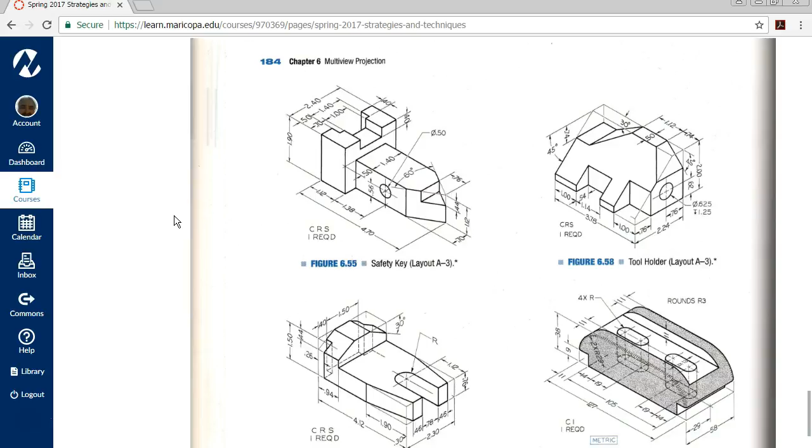So we're going to tackle the finger guide. One of the things that I like about these isometric views is they're a little more complicated than what you're at in Chapter 1, Chapter 2. This is more along the lines of maybe Chapter 3, or a little more detailed in Chapter 3. These are also similar to what you're going to find in the CSWA as far as what you're looking at in the way of geometry.

So if we were to look at the finger guide as a CSWA project, you would have maybe this isometric view of what it looks like. We would go over one screen. You would have a front view, a side view, a top view, and then whatever details are in that grouping. So a good portion of this is thinking in 3D.

Again, what I like about the engineering design and graphics with SolidWorks is there's a lot of little projects that are repetitive in nature, and you're stepping through that process over and over again. Well, these are a little more complicated, and way back in 2000, whenever I had the time, I got out my technical drawing book from my first drafting class, and I sat down and did all of the exercises, all of these figures, in about 40 hours. So from a speed standpoint, the things you're going to encounter, the things you have problems with, it's that repetition and going through the process that's going to highlight those areas.

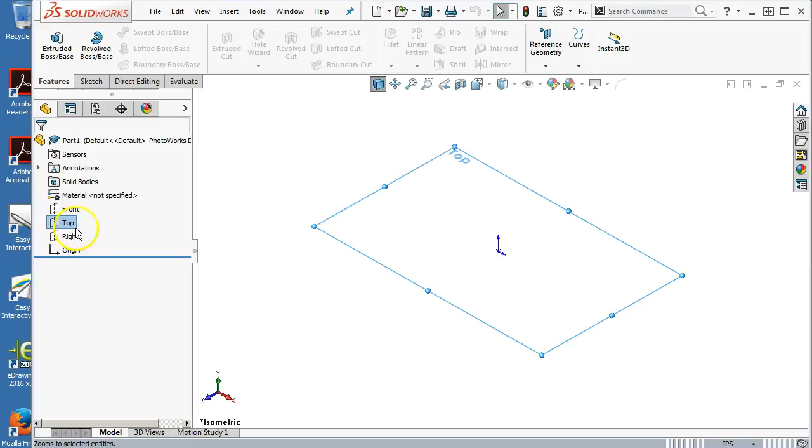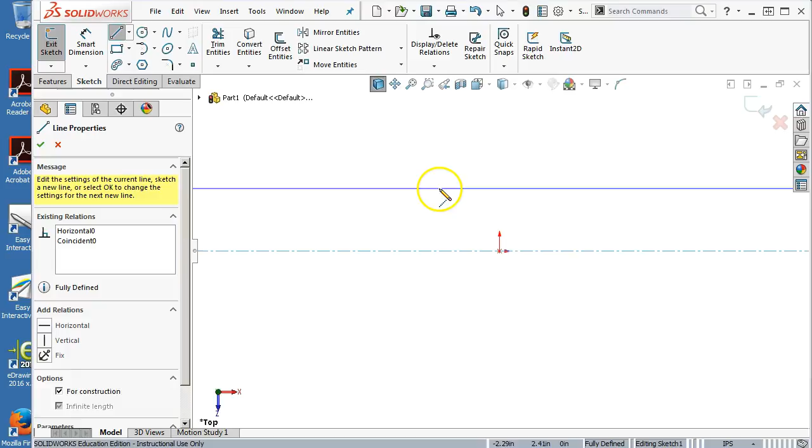And I've identified some symmetry from the top to the bottom, or left to right. So whenever you see symmetry, you're going to go directly into a center line. Horizontal in this case, I'll make it infinite length because I don't want to run out of center line. And then I just go back into the select.

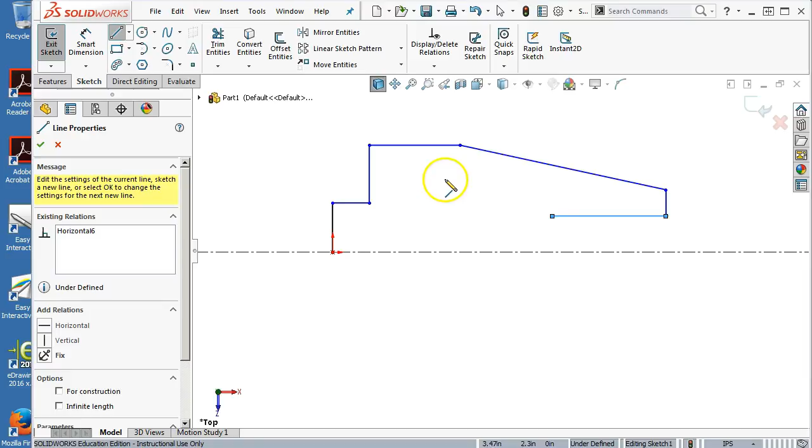All right, I'm going to trace this outside shape. And when I get over to the last portion of it, I don't really want to include the circle just yet, or the arc. This is the point where I can go ahead with the mirror. So if I select left to right, the center line is not going to be included. If I select from right to left, the center line is included. I can go directly into the mirror and get the continuation of the geometry.

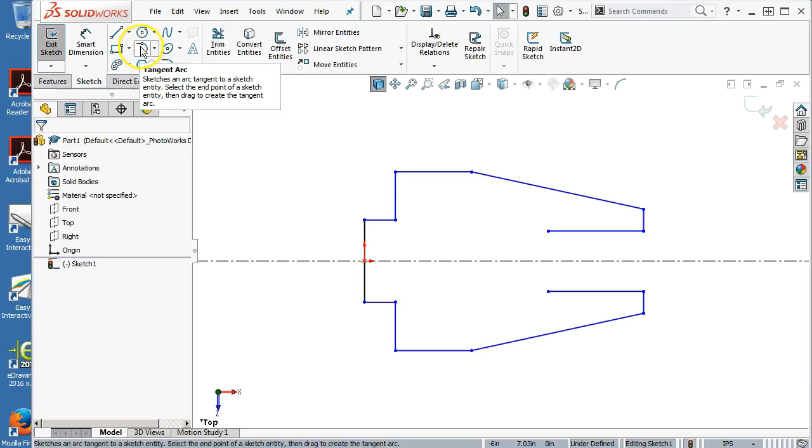Now when I go into tangent arc, I have something to connect the other end to, and we'll have that finished shape.

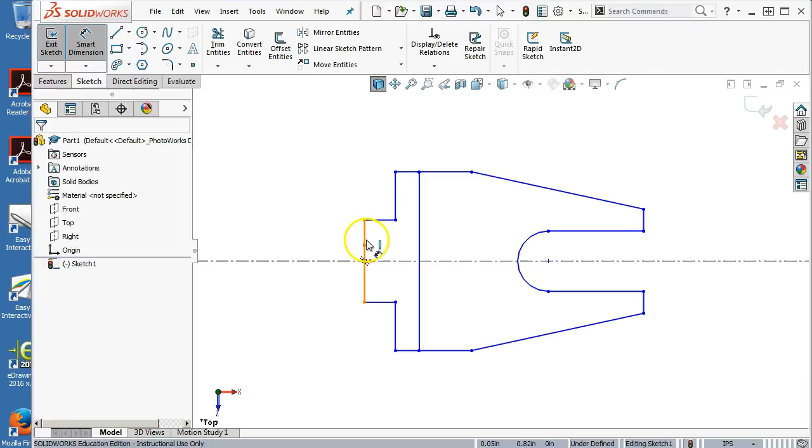To make this like the 2D drawing, we have a line somewhere in about there. As soon as I put that line in, now I'm into the contours and regions. I've made a decision that says there are two separate areas here. There's a complete contour, and then there's an intersecting region that we can go pick from. All of that sketching comes back to—I should have inferred all of the relations, or at least the relations that I need. And now we're back to picking up the geometry.

Not sure what I just put in, so let's double check it. 1.5—might have put in 150. I have to go back and watch the video on that one.

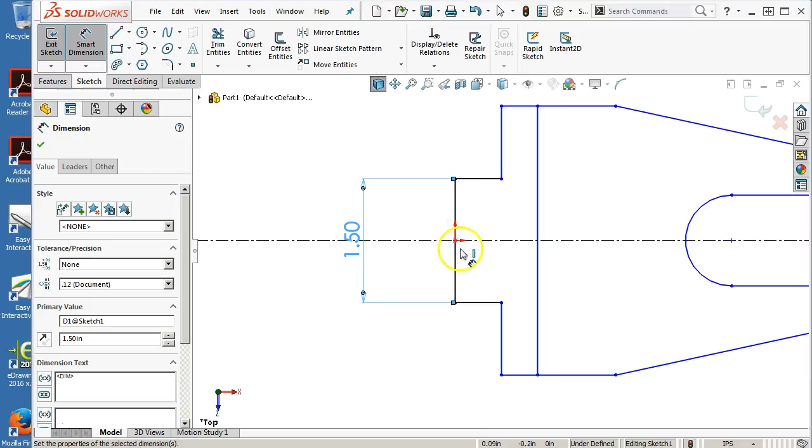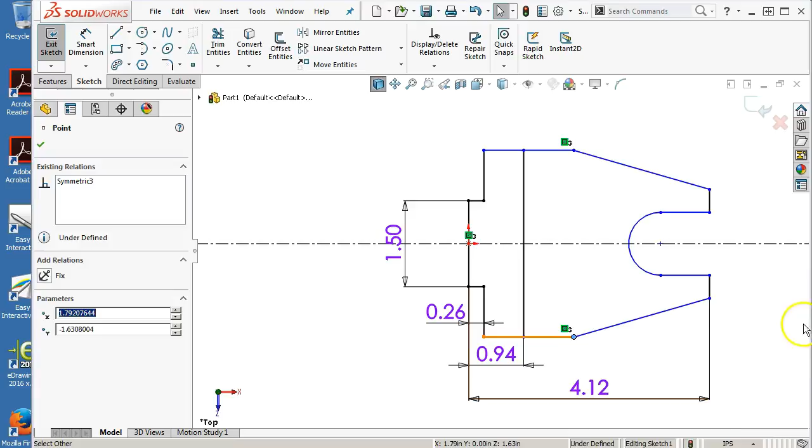All right. Let's see, we have a 0.26. 0.94 to the edge. Let's go ahead and get the overall in place, and 4.12. And we'll go ahead and drag that one out a little ways. We have a full radius for 0.78. I'll go ahead with that dimension, and it's pushed back 1.12. And then a width of 0.46.

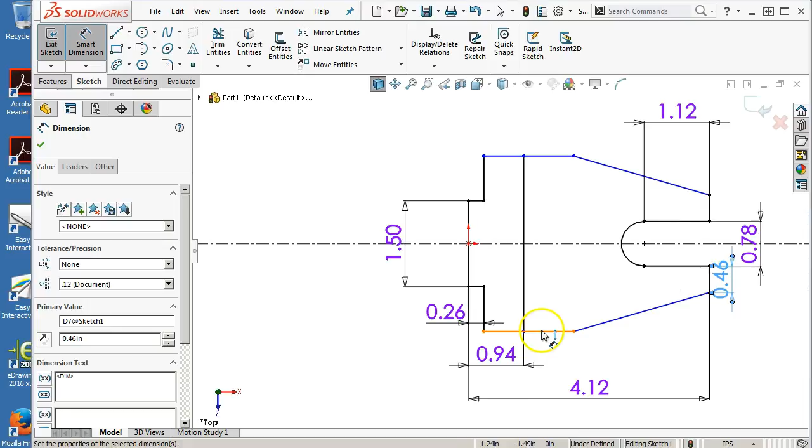So what else? What am I missing? Oh, the overall width then is 2.3. All right, so that's starting to come together, looks pretty good. And then—

Being careful or observing the angled line, keep in mind that we can go horizontal, and if I get close to it, I'll be in a linear dimension. When I come off to the side, then I'm in the vertical dimension. So I want to make sure to pull far enough down that I can get that linear dimension. So 1.9.

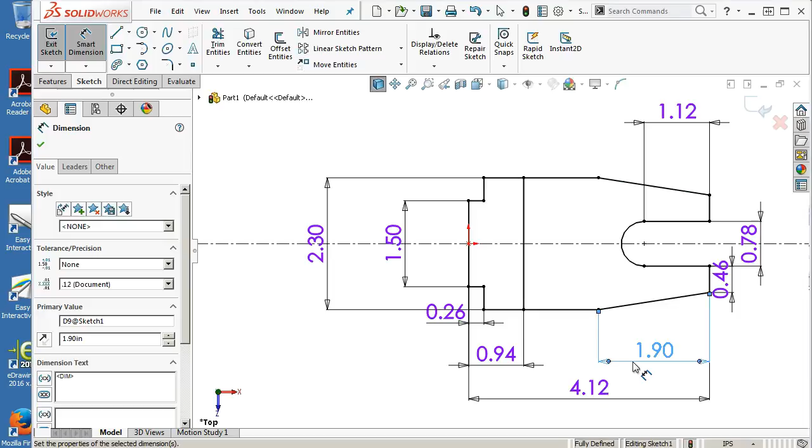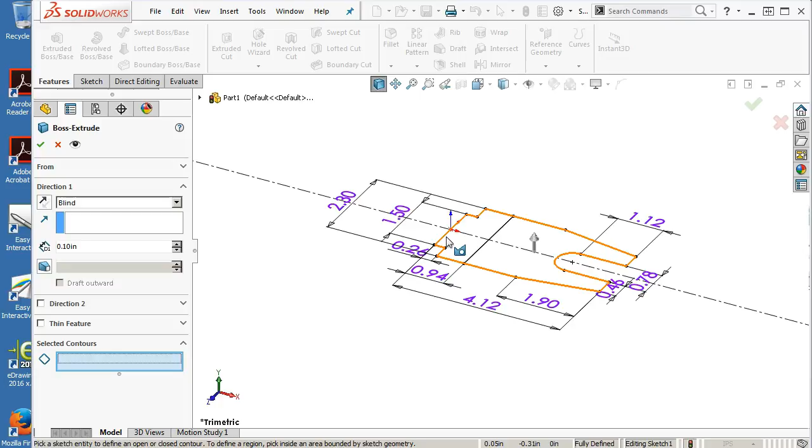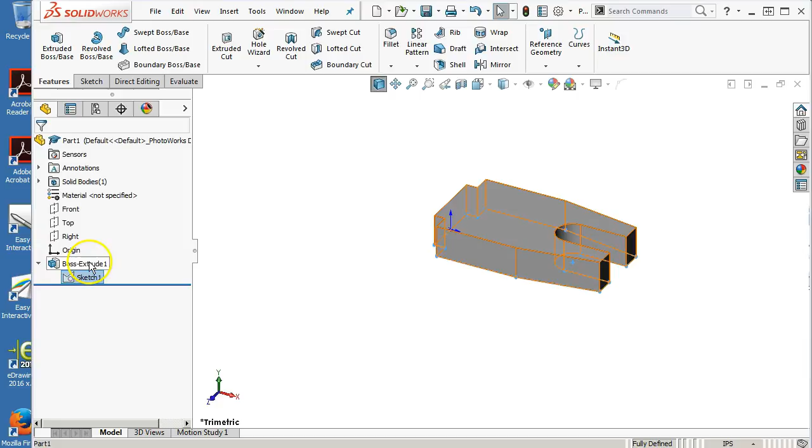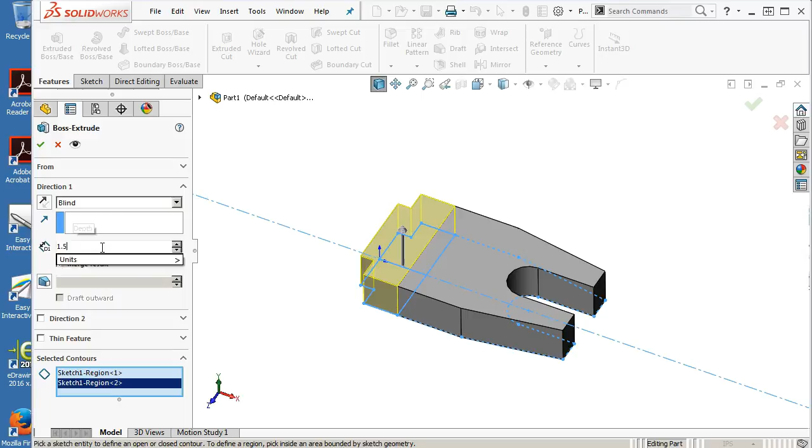I want to share that sketch, reuse the geometry that I created. So expanding out next to the feature, going back to sketch 1, making sure that it's highlighted, I can go right back into the extruded boss base, and we're selecting for contours and regions. Those are the two areas, the two regions that I want to make a little bit larger, and this is going for a distance of 1.5. All right, so in this case, because the merge result is on, I have a positive into a positive, and there's no net gain in volume or mass.

And if I turn that off and I have two solid bodies, then I have an overlap of mass, and would have to take that into consideration for any of my engineering calculations. All right, so we go ahead and accept. And that gives me the majority of the geometry.

All right, now I can go into a sketch on the front face and sketch the chamfers, but we need to introduce the chamfer tool at some point. So underneath fillet, we have a chamfer feature—fillet and chamfer are both under the fillet. And when I go into the chamfer feature, well, that was selected and that wasn't what I wanted.

And we'll go pick the two faces. All right, so we have an angle and distance. Well, we weren't exactly given an angle and distance. So yeah, we're 30 degrees and 0.44 on our numbers.

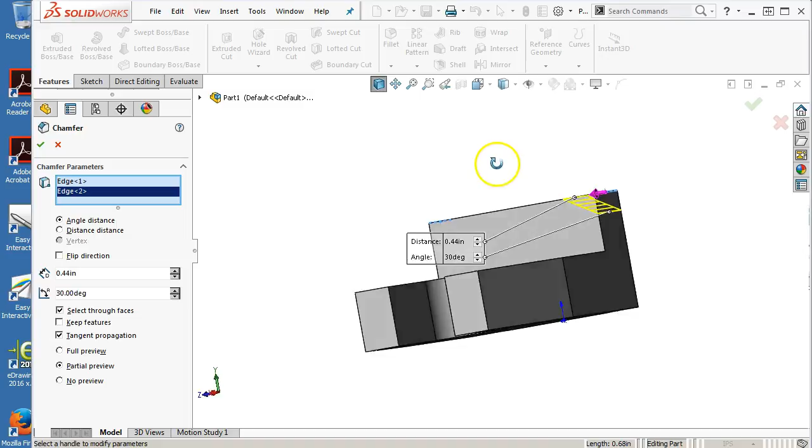So, 30 degrees and 0.44, and then we want to look at the preview. So that one looks close. We'll see what the preview looks like on that one.

All right, so based on the preview, we had an arrow coming this way. We had the arrow going down on this one, so I need to reverse it. You can pick on the arrow and flip the direction, or we can come over to the checkbox and flip the direction to see what the result looks like. So that doesn't quite look long enough, and we don't have anything to really shift that distance.

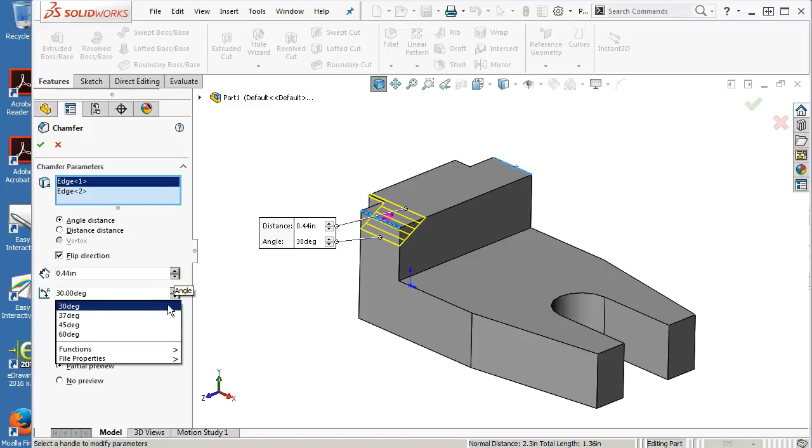So we're going to have to go to the adjacent angle, and that means that I can do 90 minus 30 degrees to end up with a 60-degree angle. Flip the direction, and then we'll check edge 2 and flip the direction, and that looks a little bit more like what I wanted to end up with.

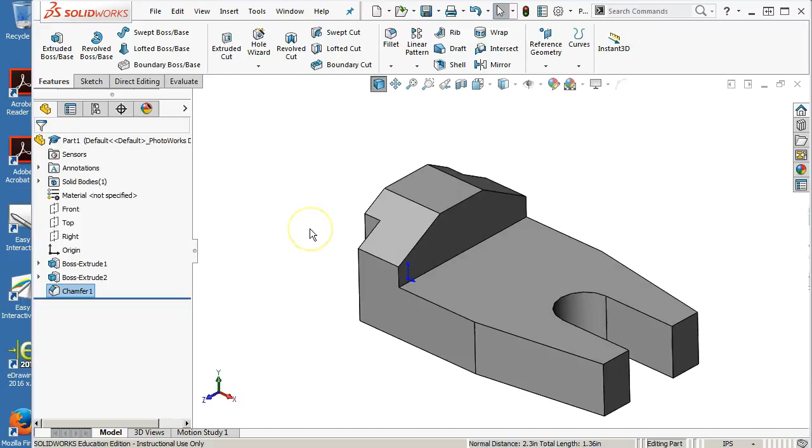All right, so when you're working with the chamfers, keep in mind that what you're selecting, or what the direction of that chamfer is going to be, is something you're going to have to manipulate and possibly pick a different angle or pick the adjacent angle to make it work. All right, so I'm going to go ahead and save this one.

And this is figure 6, finger guide.

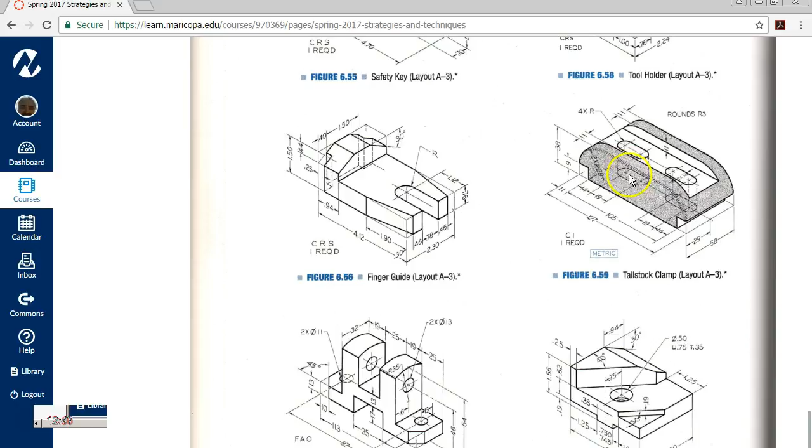Okay, so the shapes may look a little on the complicated side. The task is to break it down into manageable geometry. Going into the tailstock clamp, what jumps out is we have this nice profile out front, and we also have symmetry about the midline of the part. With the slots, we'll use the slot tool, and that part is in metric.

So, file new, part millimeter. Oh, that was one I made specifically for illustration. I have to pull that one back out.

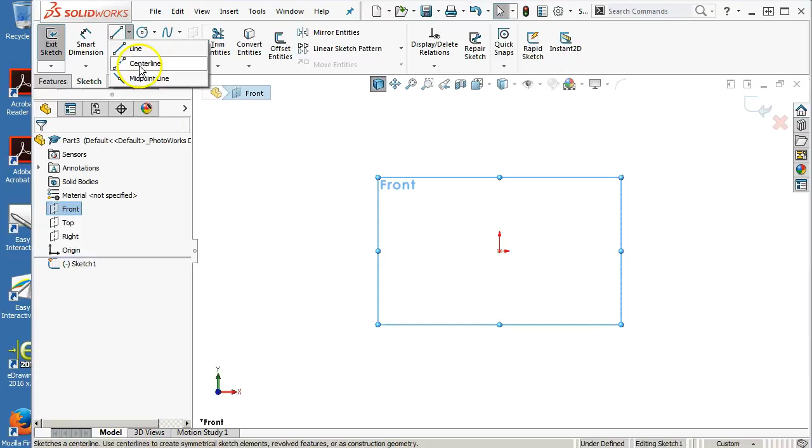So in this case, I want to be on the front plane, and with symmetry, we're going into the centerline. This time it will be vertical, infinite length, drop it on the origin.

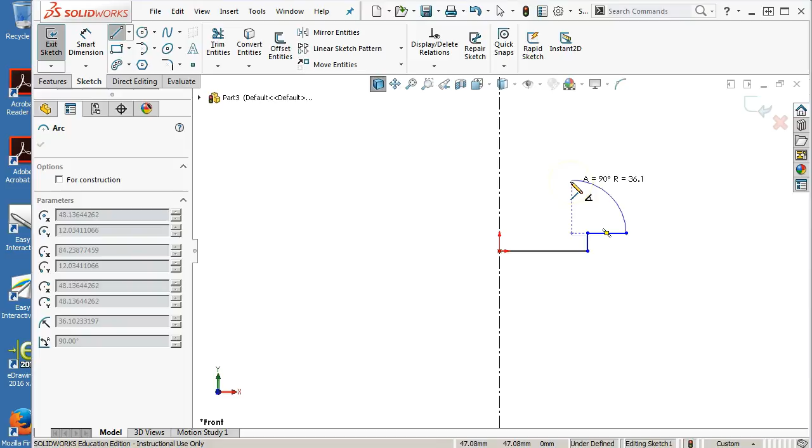Go back into the line command. We're going to come up to this point, and with the continuous tangent arc, I can start the line, go back to the start point, and the direction that I drag will give me the tangent arc. Now, what I'm not sure of is that this radius is probably going to be below this line. So if there's an inferred relation there, I shouldn't have got out of the line. We need one more. There we go. And then I'll check. We got a tangent there.

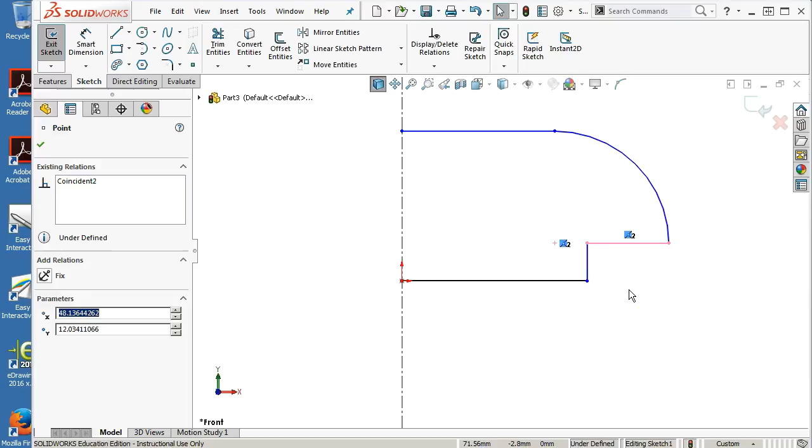And in the process, we ended up with a coincident relation back to this line. That was not something that I needed. So highlighting those little blue or green boxes, I can delete, and then we'll be able to drag to a new location.

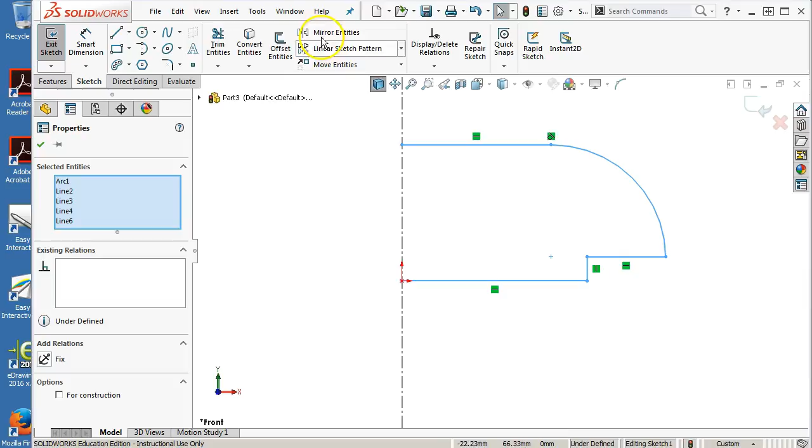So I want my overall. Again, if I go left to right, the center line is not included. Right to left, the center line will be included. If we go without, then mirror about. We'll select in the mirror about. Once I see this property manager, that'll show me a preview, and I can accept.

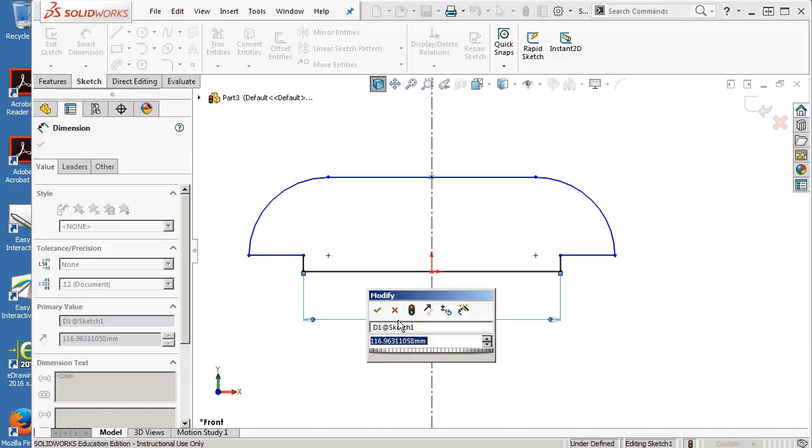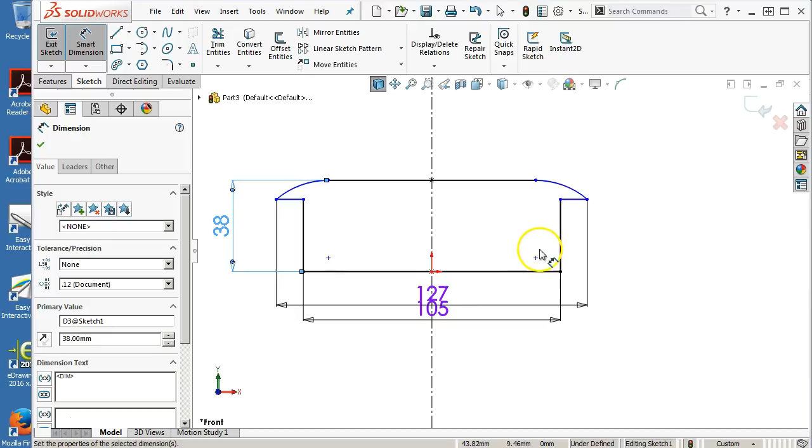Okay, now my distances go in for each of the sizes. So 105, 127. That was interesting. 38 on the height. So we'll see what kind of weird things we can get this to do. 9 on the height, the edge, and radius of 29 on the sides.

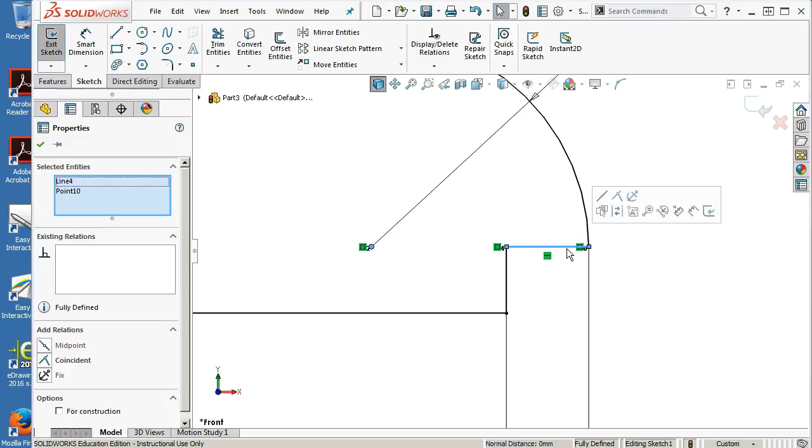All right, so if I'd left this center point even with the line, then we would have ended up being, well, it does come out normal distance of 0. Let's see, does that add up? 30, 29, and 9? Yeah, it does add up. So can't really make the assumption, but in that case, it did work out where the coincident would have held it.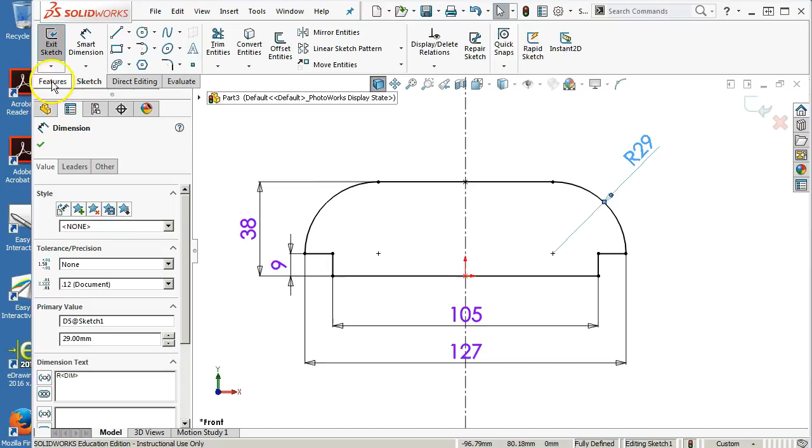For this one, I want to be midplane. So I'm going to extrude, go to the midplane, and the width is 58.

Alright, so we're ready for the slot geometry. We've generated this outside profile, we've made the width, and the reason that I went midplane was the slots are conveniently down through the center of the part.

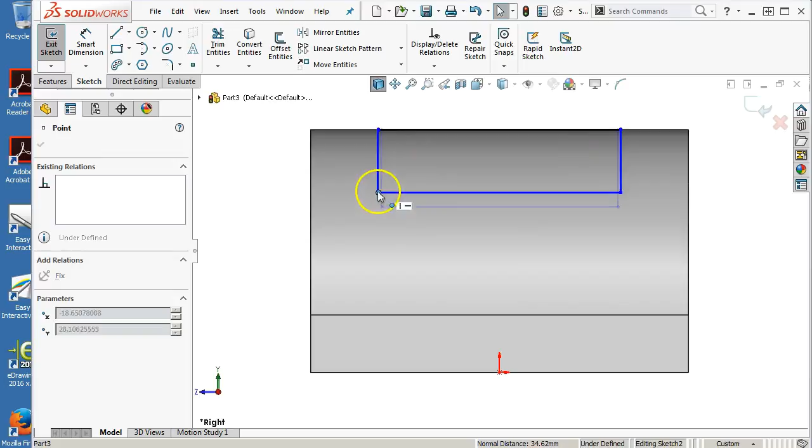And the notch. So on the notch, we'll go into the right plane, open up the sketch. I'm going to draw a rectangle in relation to the part, and then right-clicking and selecting the midpoint, we can go up to the top edge and make that a midpoint, and that will establish symmetry without actually having to put in a centerline or any additional relations.

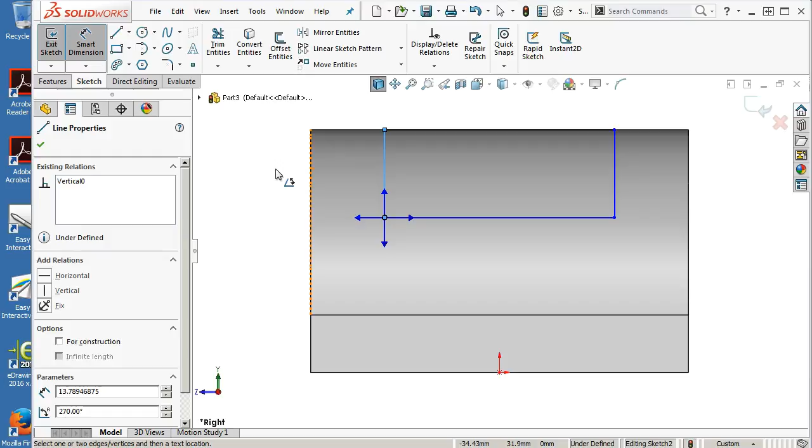When you get the little blue arrow, the four-headed blue arrow means that I selected an endpoint and a line, and it's asking me for an extension if this were an angle. In this case, when you see that, we're going to hit escape.

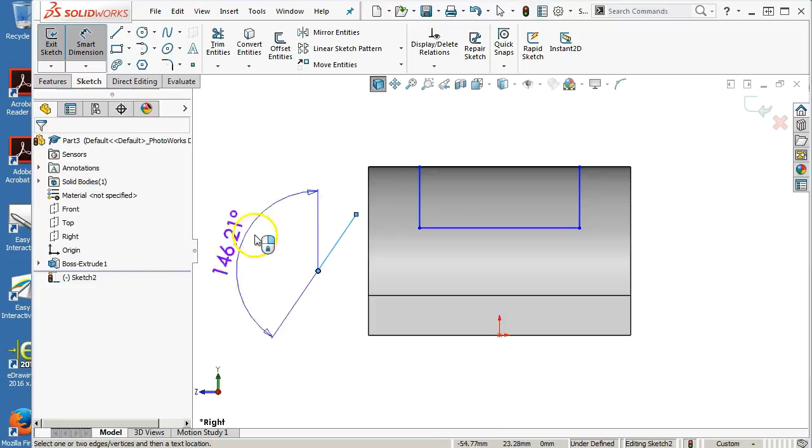What I would expect to see, let's just kind of draw a line out here. So as an example, if I grab the endpoint and the line, it shows me the arrow. It's asking me where I want the angle to be placed, and it will give me that internal or adjacent angle. All right, so we're not ready to do that, but since it popped up, we'll take a look.

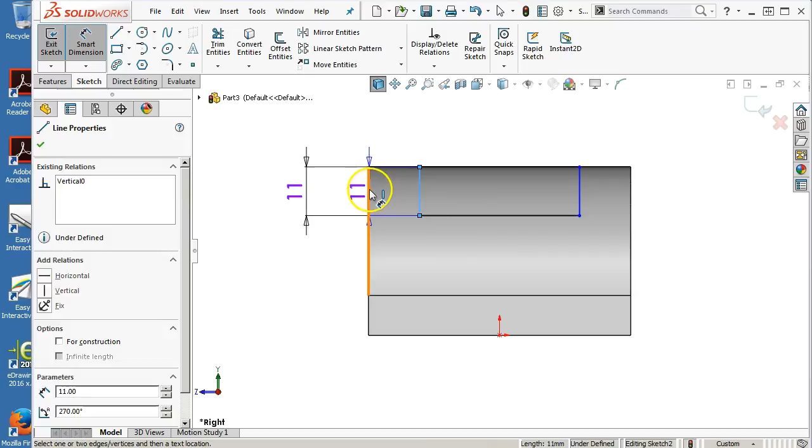Our dimension then is 11 on the step, and we're missing, so 11 on the sides, and because of the symmetry, that should be the only one I need.

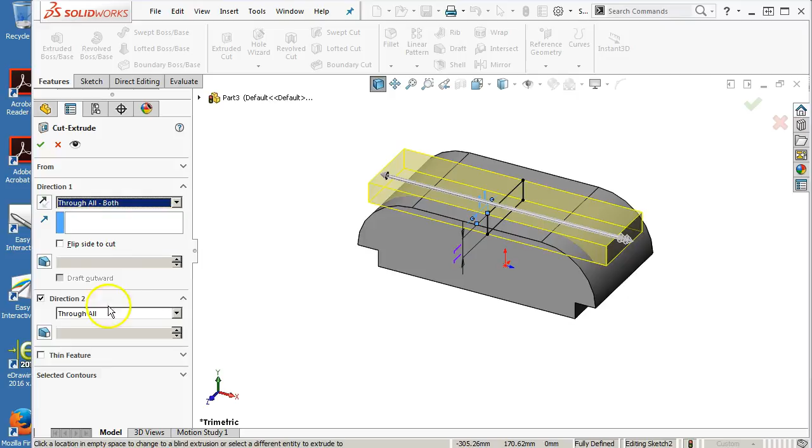All right, so when you're sketching internal to the part, this is inside of the base feature, we'll go ahead and extrude the cut, and through all in one direction we'll find the terminating edge or the terminating feature. Through all both we'll find, turn on direction 2, and make it through all in both directions. So I don't just want half of the cut, I want to make sure that it takes all of the cut.

The other options would have been to draw the rectangle on the top plane and extrude it down 11 millimeters, or on the front plane and extrude it back and forth, offset from 11 millimeters.

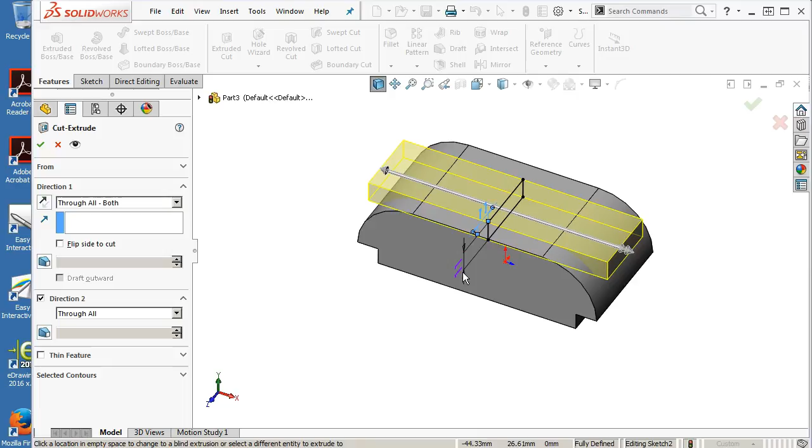All right, so that generates the notch geometry.

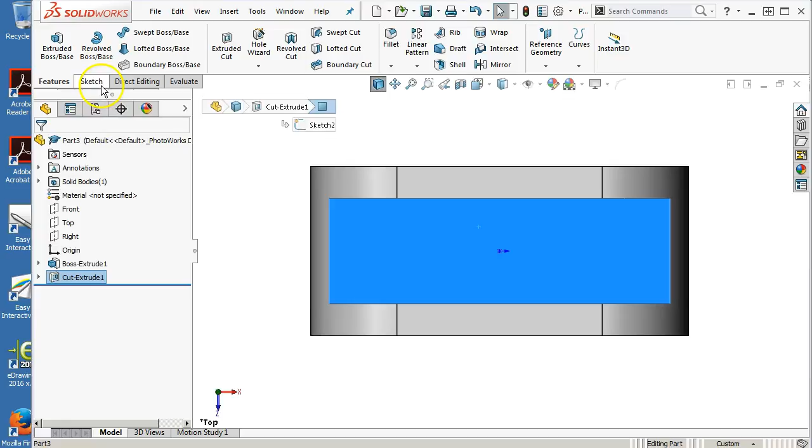Going back into the sketch at the bottom of the notch, we have 2 slots, and we'll go with kind of the old style and the new style. The new style is a straight slot, and looking for the inference, draw the center line, and as we drag out, that gives me my slot feature, or my slot sketch.

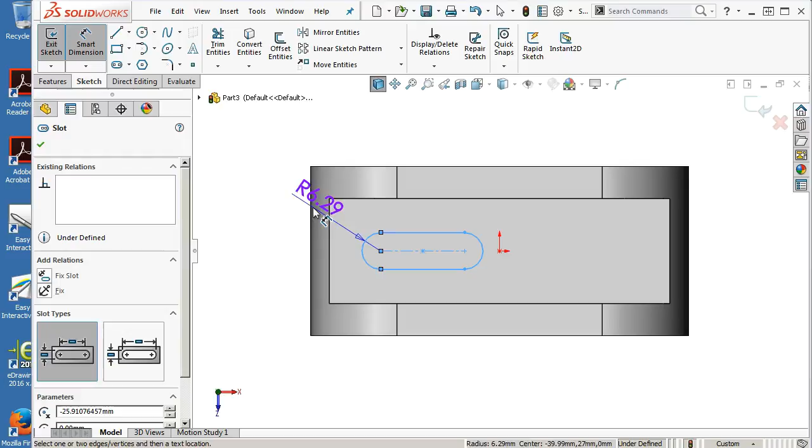It is a radius of 4 times, I think it says 13. All right, so we'll go with 13. And the length is 19.

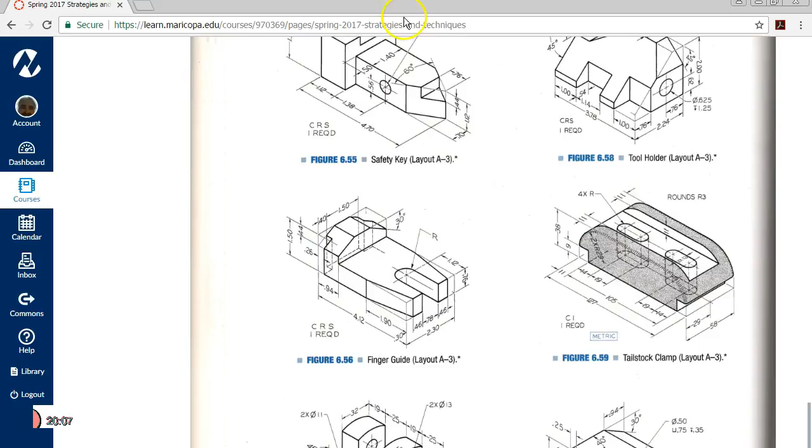I'll fly that back in. All right, so 19, 14, since I didn't pick the bottom face to sketch on, I have to have some means to put this 14 millimeters in relation to that bottom edge. To do that, we can either rotate over to where I can see it, and because this edge can be projected into the current sketch, it is valid geometry to select from. So my extension line gets projected into the current sketch and shows up as a reference, or a dimension.

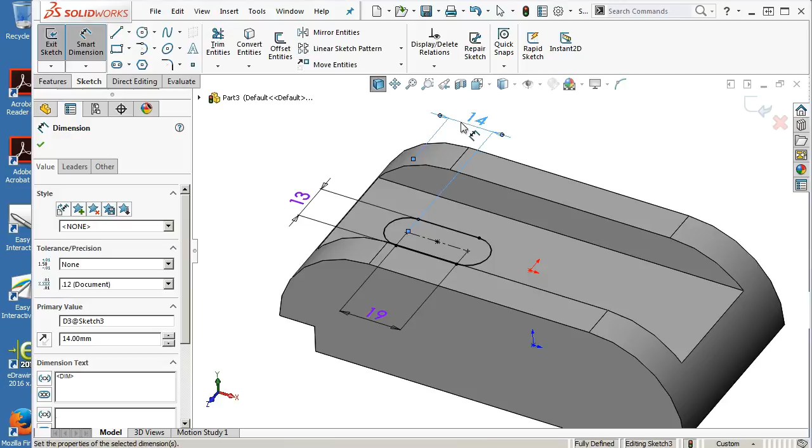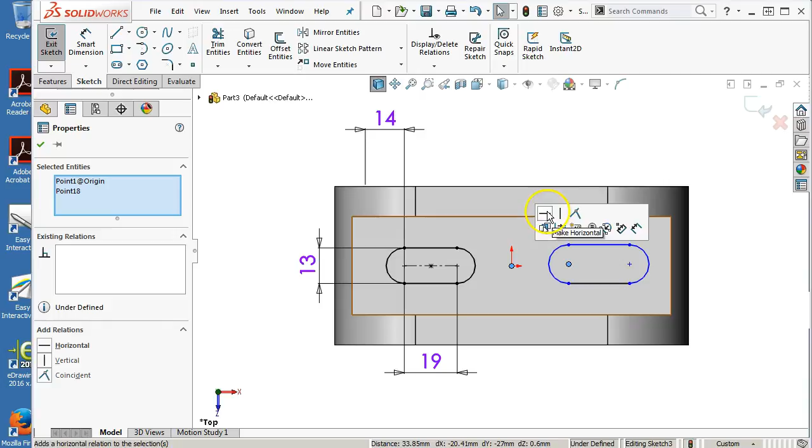Okay, so the old style, the way we used to do slots, was draw the line, do the continuous arc, go back into line, go back into the continuous arc. So I'd expect to have tangency on both ends. My vertical, I need to place horizontal to the origin. Set the width for 13, so it picked up something there.

And then the other method would be, instead of rotating over, we'll go to hidden lines visible, pick the hidden line, pick my arc, and give it the 14 dimension, and go 19 on the width. All right, so if I build it myself, I get this. If I use the slot tool, I get this. And both of them are pretty much the same, going to be the same geometry.

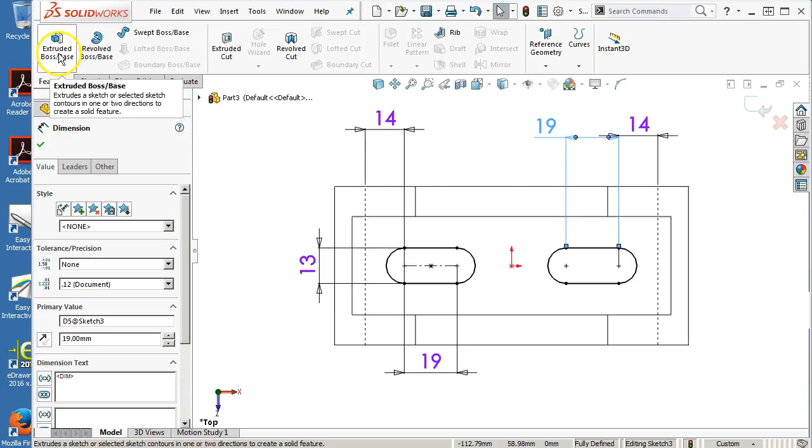Go ahead and make the extruded boss base. Oh, went the wrong way. And let's go ahead and accept whatever that is.

All right, so item of note is Instant 3D will allow me to switch between a boss to a cut. So I can grab onto the arrow, and as soon as I drag back through the geometry, then it becomes a cut. Now there's nothing really there to select. If I left this as a blind slot, I could drag the base back up, and I guess as long as the arrow is accessible, I can drag it and reverse it.

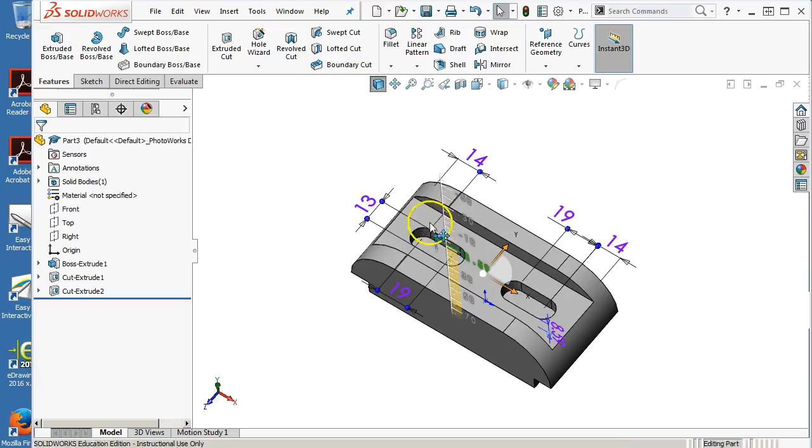And then that changes to the cut extrude 2. And when I edit its feature, then I can go up to next or through all.

And then the last two pieces of geometry. Now notice when Instant 3D is on, I'm getting the XY. I'm getting those handles, which is asking me if I want to drag. So I'm going to go ahead and turn those off.

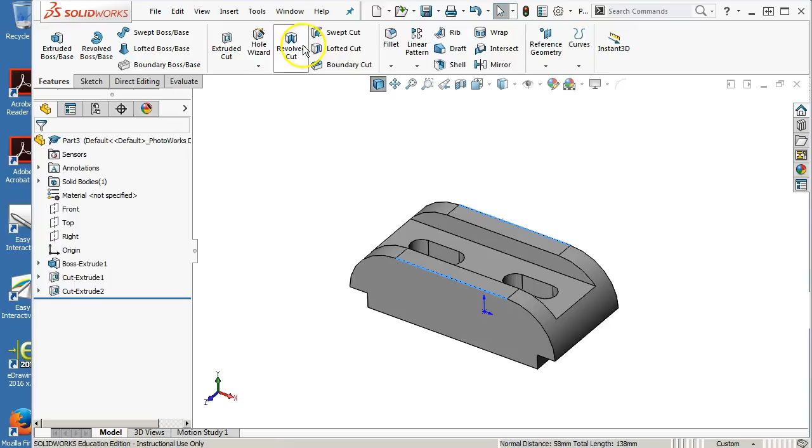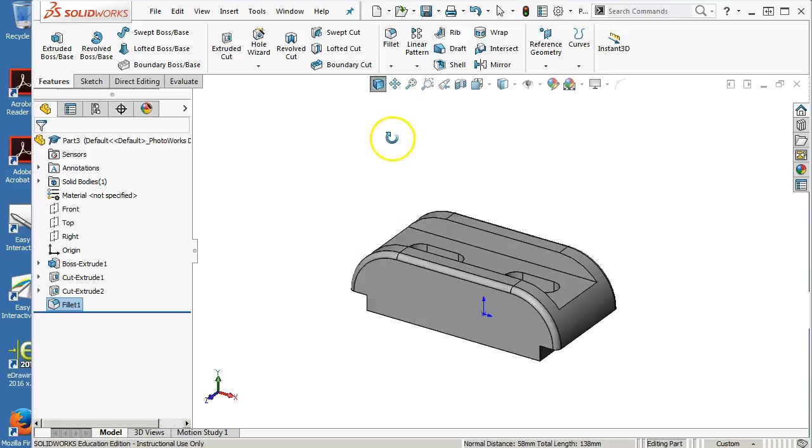We'll go into the fillet. And the fillet rounds are 3 millimeters. Okay. So we'll go ahead and save that one.

And go to the tailstock clamp.

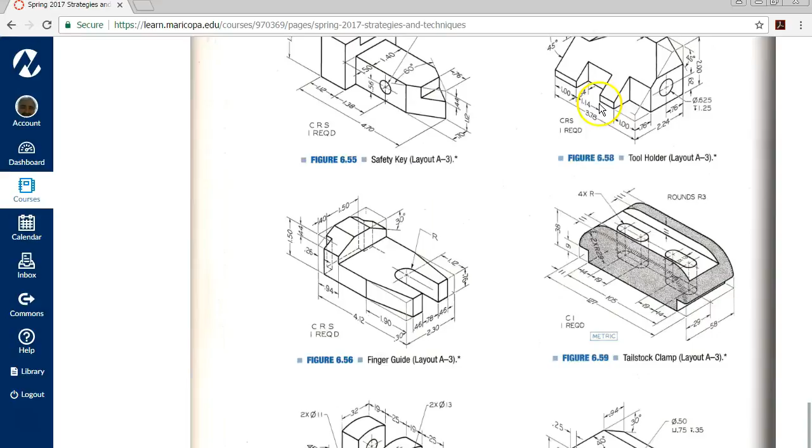All right, so one more with symmetry. We have the rod support, and symmetry is again kind of through the middle. And I want to show the dynamic mirroring. It's not one of my favorite techniques, but it is useful to know how it works. This is a metric part.

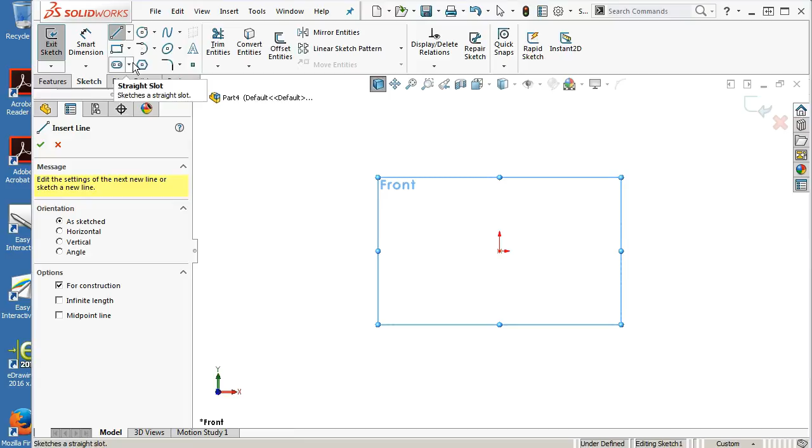So on the front plane, we're opening up the sketch. I'll go ahead and put in the center line for reference, infinite length, vertical, and place. And let's see, under Tools, Sketch Tools. There it went, Sketch Tools. We have this thing called Dynamic Mirror. Dynamic Mirror will draw everything that I draw on one side, and also draw it on the other side.

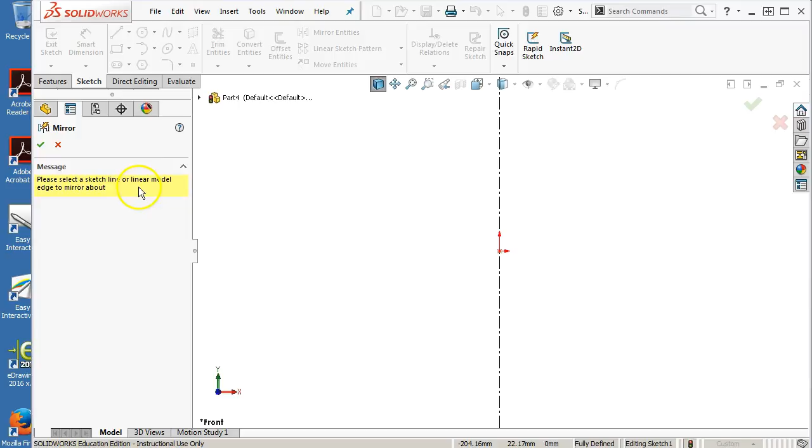So select a sketch line or linear model edge to mirror about. There's my center line. And so I draw a line, I get the opposite. And I went too far. Okay.

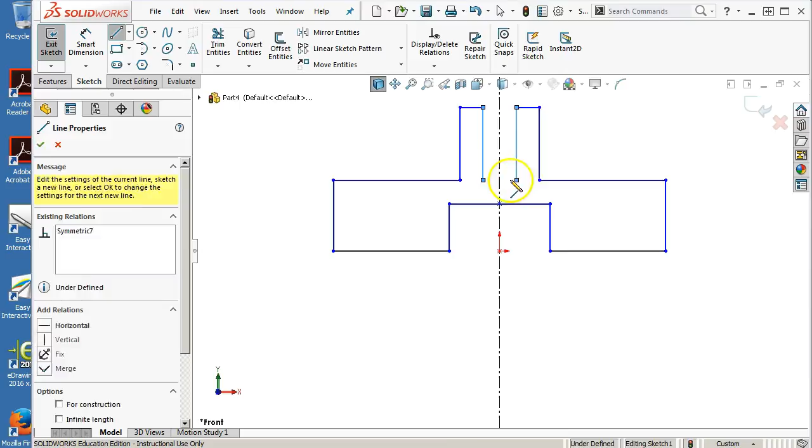Now that dynamic mirror will stay on until I go back and turn it off. So it'd be one of those things, from a customization standpoint, if you're going to use it, add it to your CommandManager somewhere. Otherwise, Tools, Sketch Tools, the icon is still highlighted. You need to unhighlight it, deselect it, and we're ready to start adding dimensions.

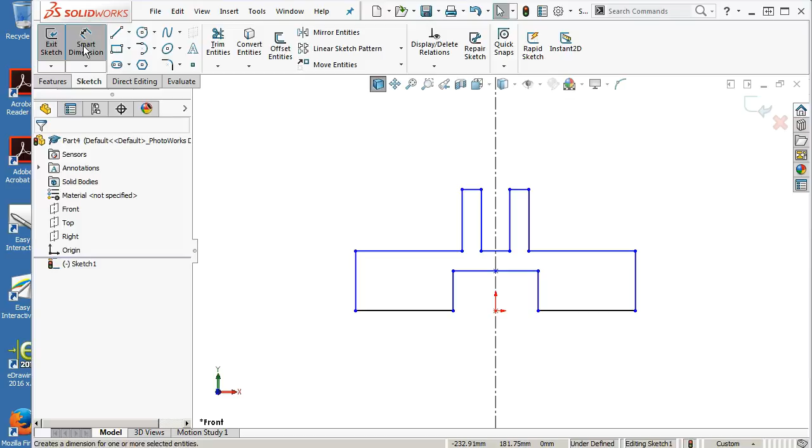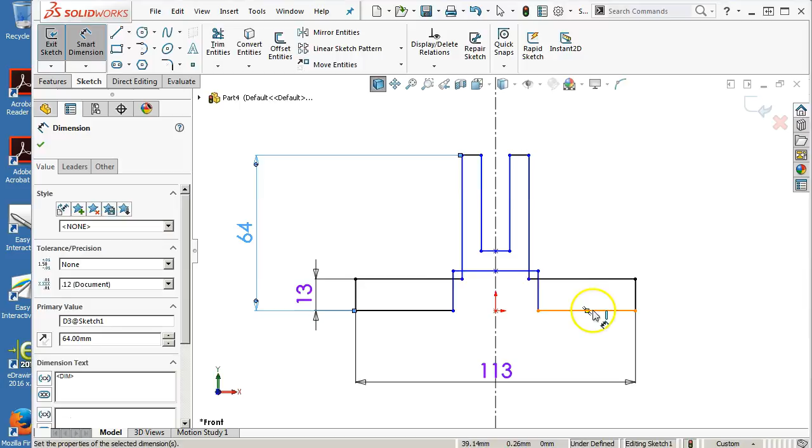And height of 13. Let's see if we can get this to flip-flop a little bit. Height of 64. Didn't do too bad. I guess the main thing with sketching is, as things invert and do strange things, you need to be able to identify the geometry and put it back in sorts.

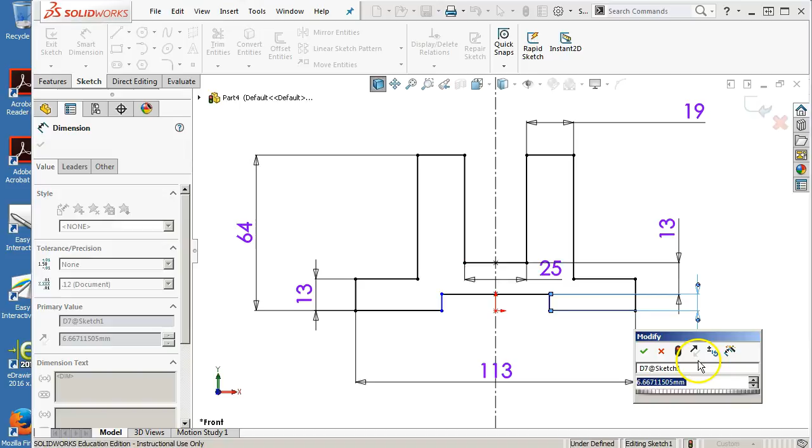Alright, so the width is 19. And spacing is 25. And then the height, 13. And height of 17. Alright, and the base width of 35.

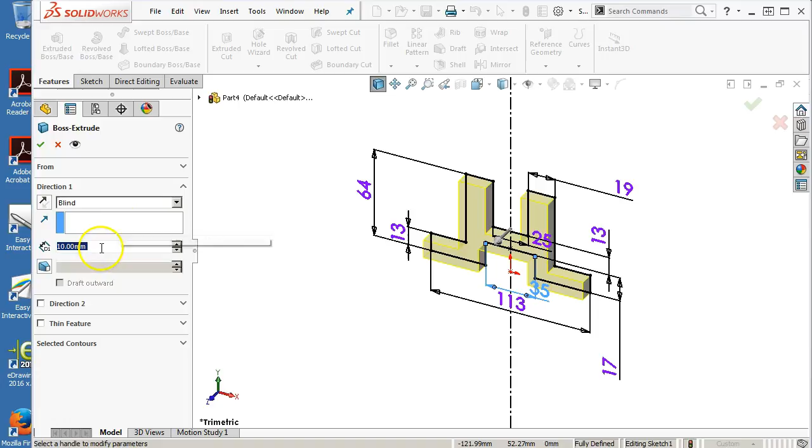So no great advantage to going mid-plane, blind, one way or the other on the extrusion. So we have a width of 32. And that'll build the shape.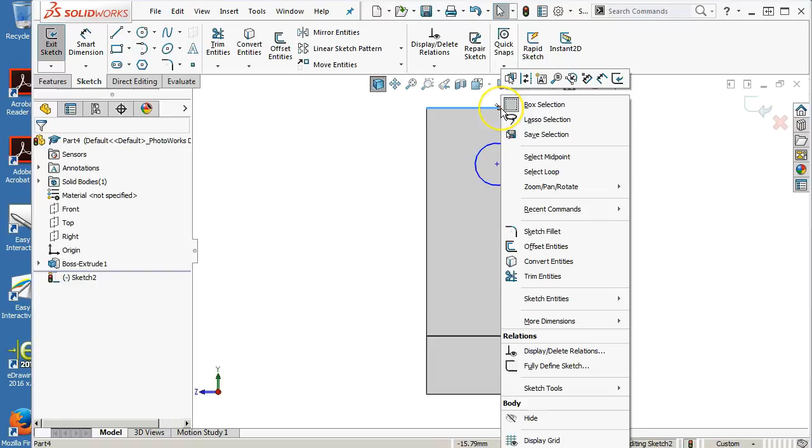Alright, so circle. And I want this to be centered, so my design intent says I can either put in a center line and relate the center point to it, but I can also right click and go back to select midpoint, control select the center of the circle, and make that vertical. Height dimension is 46, so grab that for me.

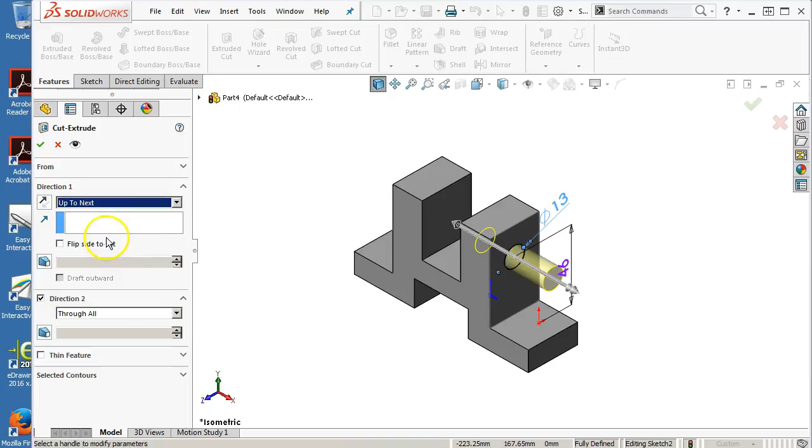And what do we have? 13 millimeters for the clearance. So this is a good illustration of what happens when we get to the isometric view, what happens when we go up to next. So through all finds the very last piece of geometry, the back face. There's not really a through all both, but if there were, it would find this face. And if I go up to next, it finds the end geometry. Let's go ahead and turn direction 2 off again.

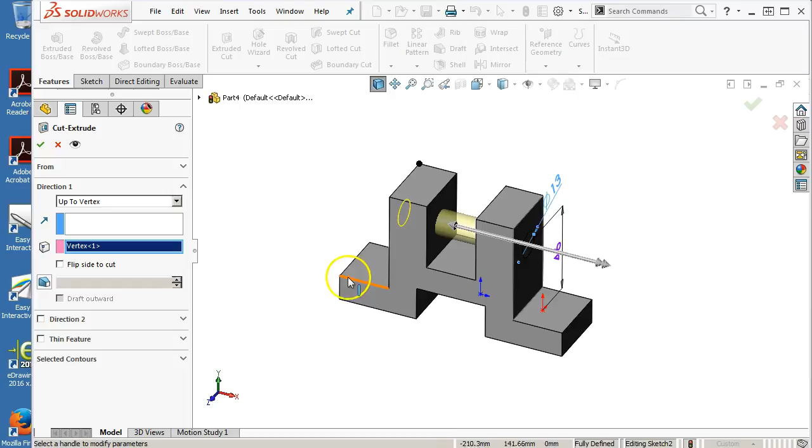Alright, and in reference to the arrows, I have a single arrow that is direction 1, double arrows that are direction 2. Up to vertex, if I pick any of the intersecting corners, I'm going to get different results. Up to surface, picking a surface. And let's see, do we have anything else? Offset from surface up to body midplane. No, those don't really fit, but it does illustrate what the other end conditions can do.

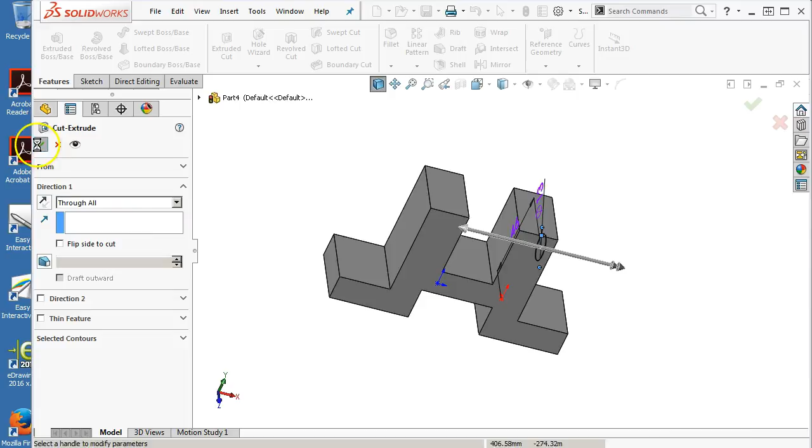All right, so the two on the bottom, as long as these legs end up at the same height, I can open up a sketch on this face, and it will carry over through that plane to the other face.

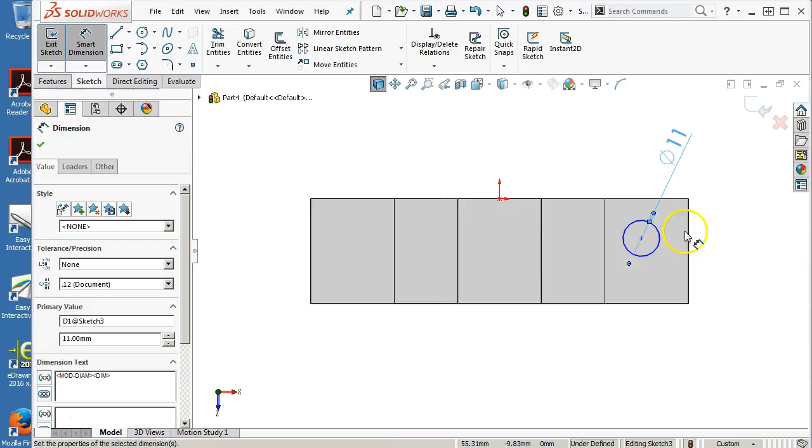So circle of 13 millimeters. Nope, 11 millimeters. Distance of 13. And 13 off of the outside edge.

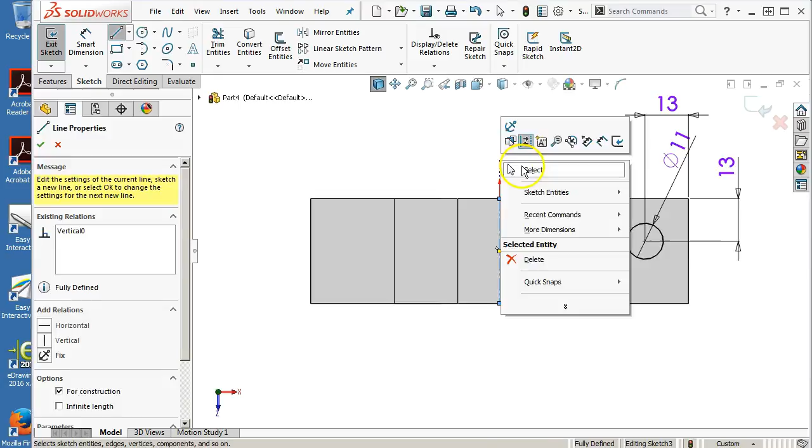All right, so I want a mirror, and I need a center line to perform the mirror, so if I don't recognize it immediately and put it in, I can always put it in later. Select, go into the mirror entities. It'll grab the center line and the circle in this case, and that puts me to where I'm ready to create the extruded cut. And then it will be through all or up to next.

So chamfers and radiuses usually go in last. So we'll wait on the radius. The arc then, radius of 35 on this arc comes up tangent, and we have a couple of locations.

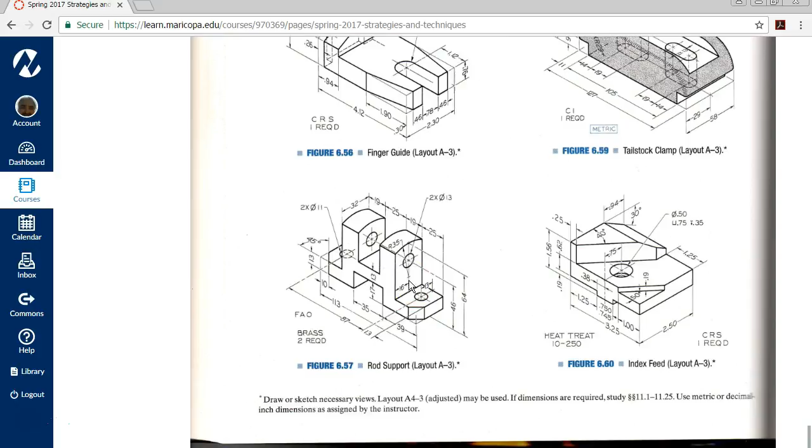Well, I can't do tangent. Sort of know where the center point is, but not really. Could calculate it: 64 minus 35. But I'm going to want that arc to be tangent to the top and coincident to the endpoints. So I'm going to go Control 8, Normal To.

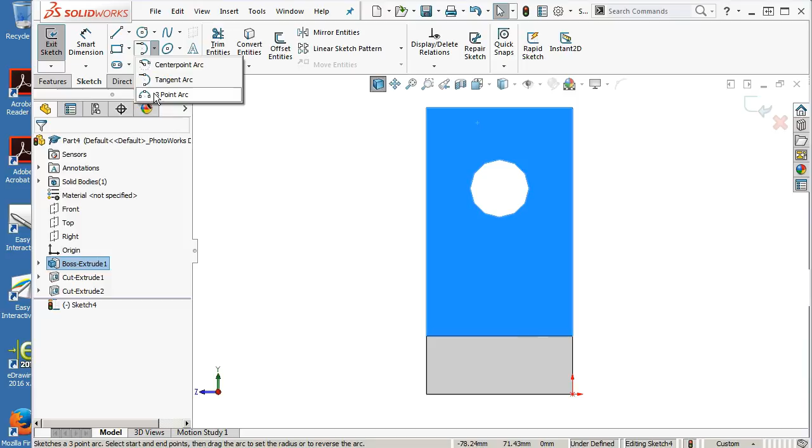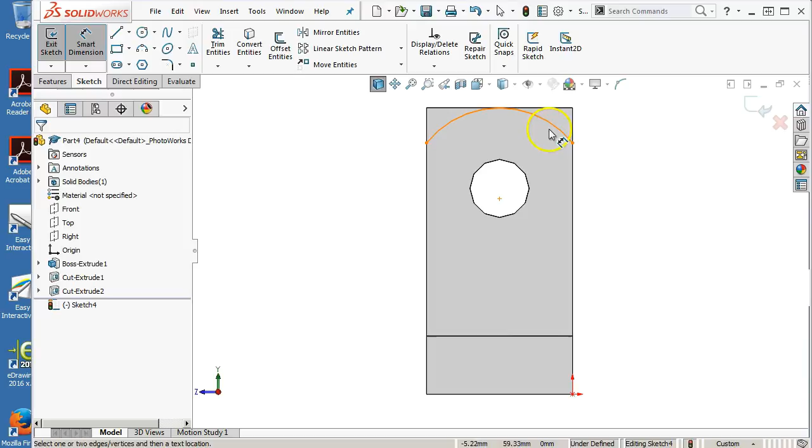We're opening up a sketch, and this is a good place to use the 3-point arc. A 3-point arc says I can start, end, and that's about what it looks like. When I go in to set the relations, then I can set tangency. We can go ahead and set for a horizontal, and when I apply the dimension of 35, that should take it to be fully defined.

So in certain versions, we'll see if it does it here, the point where this circle, the single point where this arc or circle touches that edge is a 0 thickness, and it's going to fail because of 0 thickness geometry.

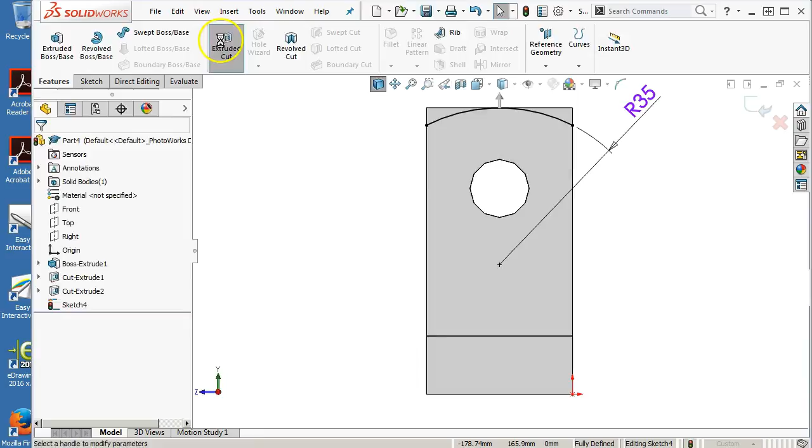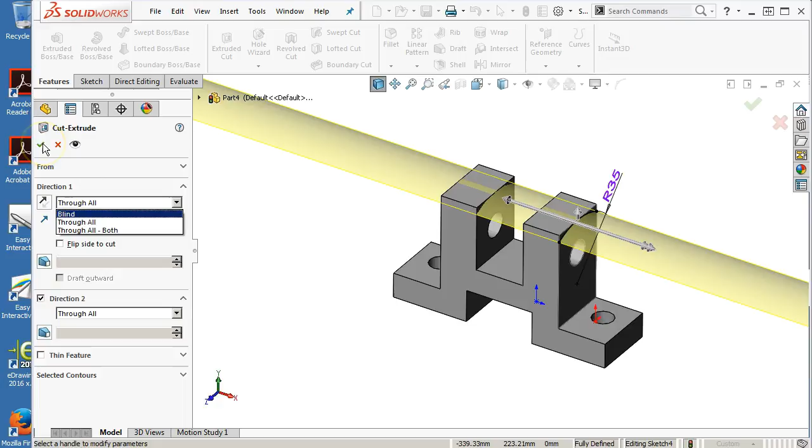So when we extrude cut, the direction of cut and the area, we're going to go through all. And because this is an open profile, it's not closed off, by default it will go through all. In 2016 they added a blind condition for the cut extrude, but I don't really think they should have made it default. They should have left it at through all. But it may just be the first thing in the list too. So we'll go ahead and accept, and it makes the cut.

So if I were to get a 0 thickness error, I would go back into the sketch and draw a little extension onto the sketch, make it to where it would make a cut complete through the part.

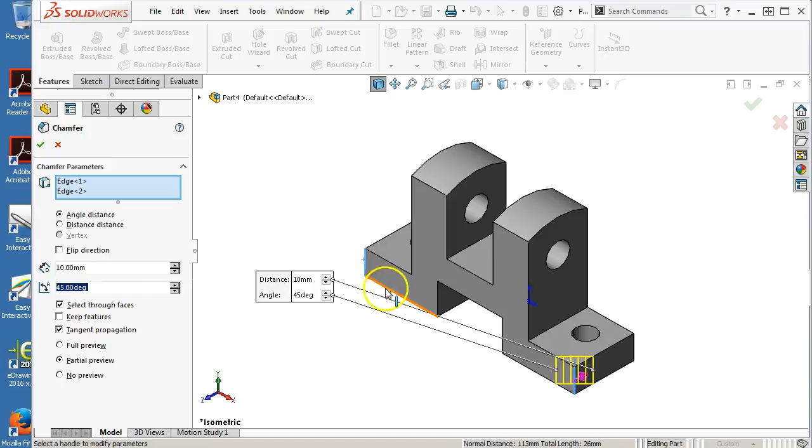So getting into the other chamfer, on the right mouse button or on the pop-up, we can go directly into our chamfer. It's going to be 45 degrees. We have the last one, the previous settings, and I have a distance of 10 millimeters. So 45 is equal. I'm not worried about the direction. You go ahead and accept, and that makes our rod support.

And that is 657. Okay.